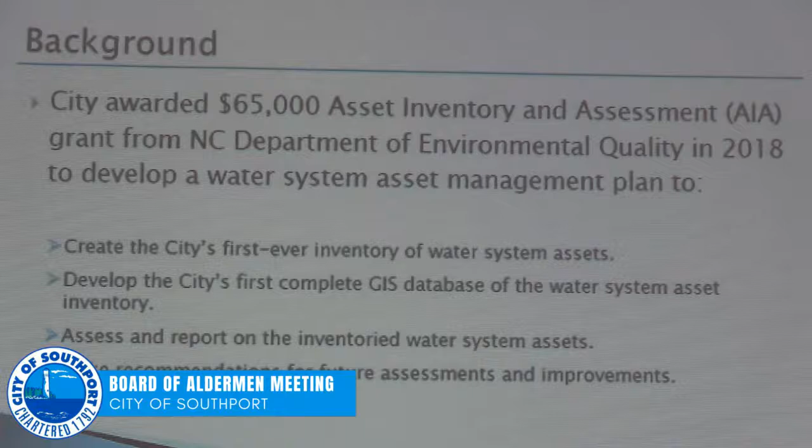The purpose of the plan is to create the city's first ever comprehensive inventory of your water system assets, to develop the first complete GIS database of those assets, to assess the condition of those assets and report on the condition of those assets, and then to make recommendations to you, the elected board, on future decisions you might need to make about maintaining and operating your system.

The consulting team is the Cape Fear Council of Governments and the Lumber River Council of Governments. The Cape Fear Council of Governments was primarily responsible for project management and taking the lead on the asset inventory and the mapping component of this project. We brought Gene in to assist with the condition assessment, the financial plan, and really crafting the bulk of the paper document, the asset management plan that I will leave with you guys today.

So what is asset management? Asset management is the practice of managing infrastructure capital assets, so we're managing our assets in order to minimize the total cost of owning and operating those assets, to prolong the useful life of those assets, so that you can deliver the desired level of service to your customers.

I think it's important to take a moment to consider this. The purpose of the asset management planning is to minimize your total cost. We're going to be getting into some recommendations later on that are going to sound a little bit like we're trying to maximize your total cost.

But in reality, the truth is that these assets have a useful life, and they're most effective during their useful life. As they exceed their useful life, they start to cost more and more to own, to operate, and to maintain.

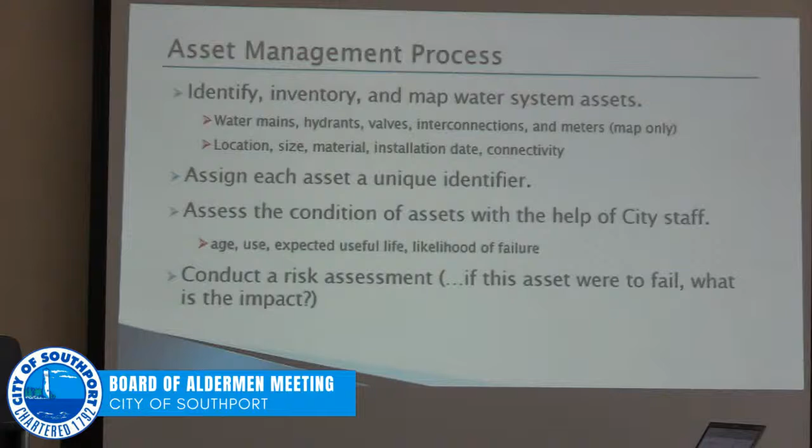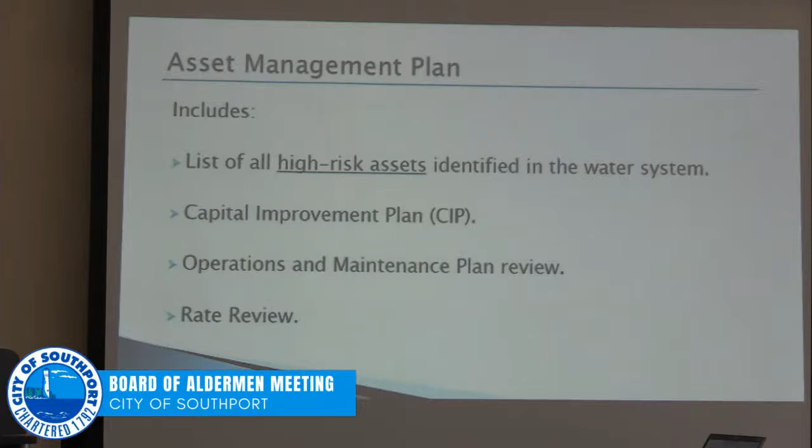And we conduct a risk assessment - the question of, if this particular asset were to fail, what is the impact to the system? So the asset management plan includes a list of all the high-risk assets identified in the water system. There's a capital improvement plan to help identify the necessary investments required to maintain operations of the system, an operation and maintenance plan review, and a rate review as well.

Something to keep in mind, an asset management plan is always a work in progress for a number of different reasons. One is that your staff is always working on the system, so this is a snapshot in time, and presumably there have been modifications and updates even since we started doing the analysis and stopped collecting locational information and inventorying the assets.

But also, the reality is that we developed this map and this list of assets from paper maps, from CAD files from developers, from old maps, and a lot of it from documenting what's in the head of your staff. Certainly there are assets that we missed, and so this is a work in progress because it's going to need to be maintained and updated. There will be changes, additions, things replaced, line breaks that will need to be improved and fixed.

So this is always going to be a work in progress, and I guess now is as good a time as any to let you know that part of this process is that we've developed an app for tablets where they can make updates and notify the Council of Governments who's maintaining this data for you that we found something new that should be located in this location, or we've replaced this asset, so now the installation date is today, and the material is no longer cast iron, it's now PVC, or something along those lines.

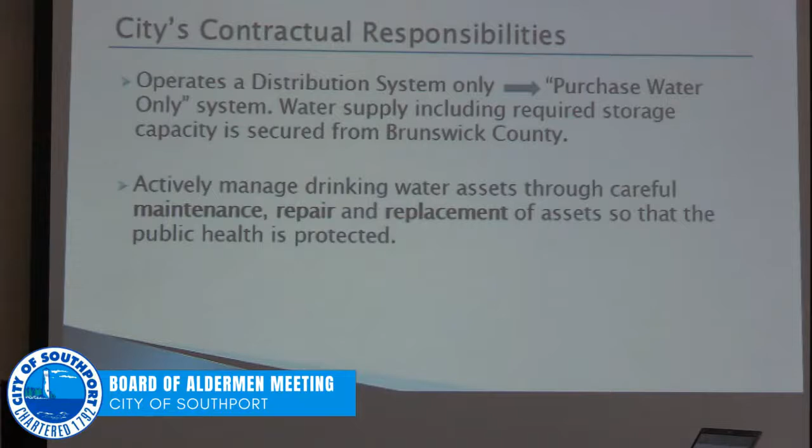So that is all your lines, the assets that Alan talked about—the water lines and valves, the hydrants and the hydrant valves. Those are your responsibilities to maintain, repair, and replace when they get to the point that they need to be replaced.

You are currently contracted, by the records I had, for 1.418 million gallons a day. That is to cover your average day use without any problem, your max day use, which typically occurs in the summer when you have more water demand because you've got more people here, and the required storage.

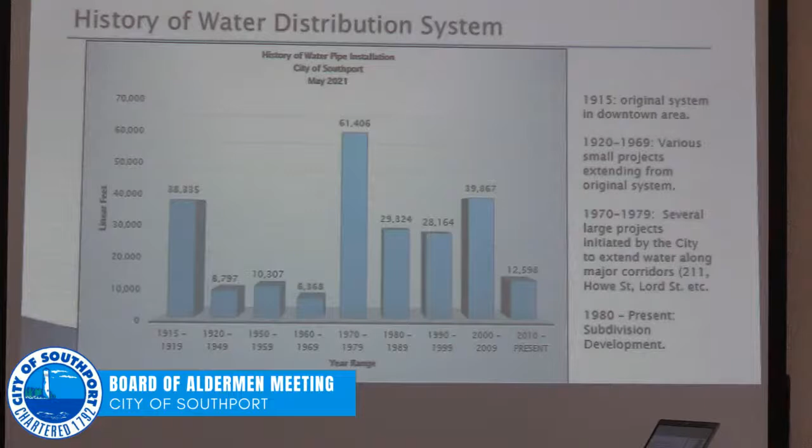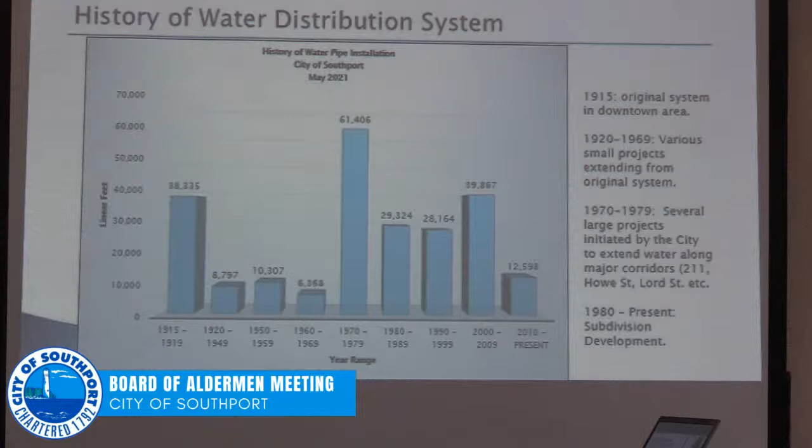Then in the years from 1980 until the present, most of the investment's been done by developers, not necessarily on the town's dollar. Those investments have all been PVC or ductile iron when they needed to have an iron component.

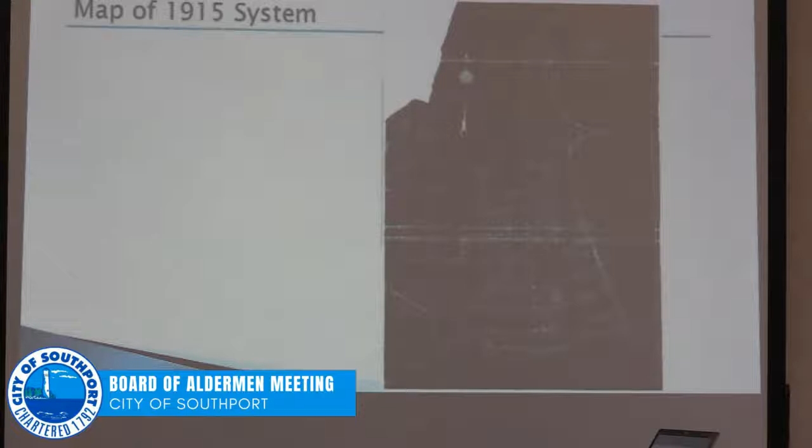So hard to see, but a really cool map—Tom has it at his office. If you ever have a chance, go by and look at it. It is the map of the original water system, and you can clearly see that original grid pattern. You have cast iron that was installed in 1915 that's still in use today in your downtown area.

So that being the case, when you look across all the water line that you have, I asked Tom this question: what's the most problematic line? What gives you the most heartache? What gives you the most maintenance calls? According to Tom—and I totally agree with this, I thought maybe he'd say some asbestos cement, but he didn't—he said small diameter cast iron line close to the surface.

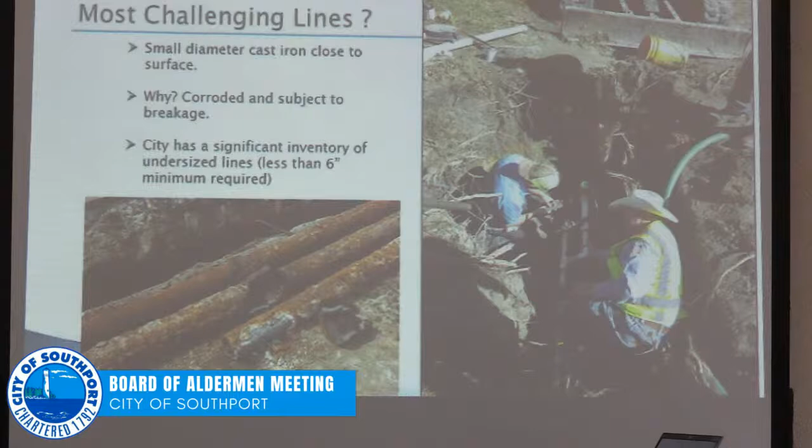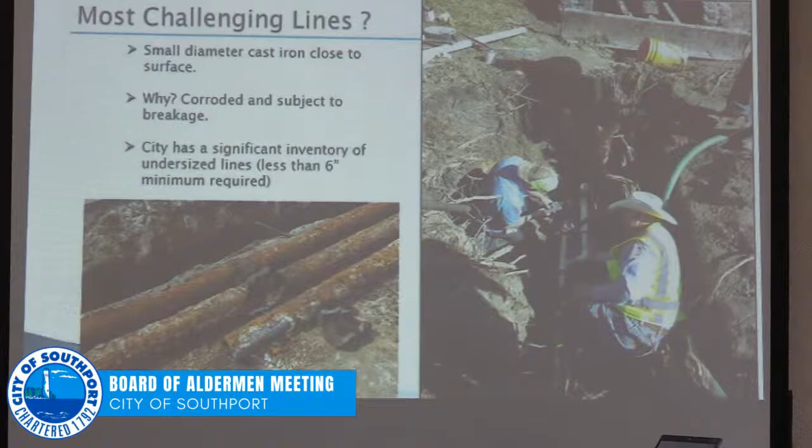You can see in this bottom left picture exactly what happens to cast iron over time. Cast iron corrodes from the inside and from the outside, and eventually it just becomes paper thin and collapses. I'd guess that most every cast iron line you have, while it was installed at a time when that was the only pipe type—that was the only thing going, the only ride to take—is thick and has done its job. It has more than done its job. It's been in the ground, and in service, much longer than its useful life period.

And so all of the water system in the downtown area, not unlike the sewer system in the downtown area that you're addressing part of now, is in need of change out.

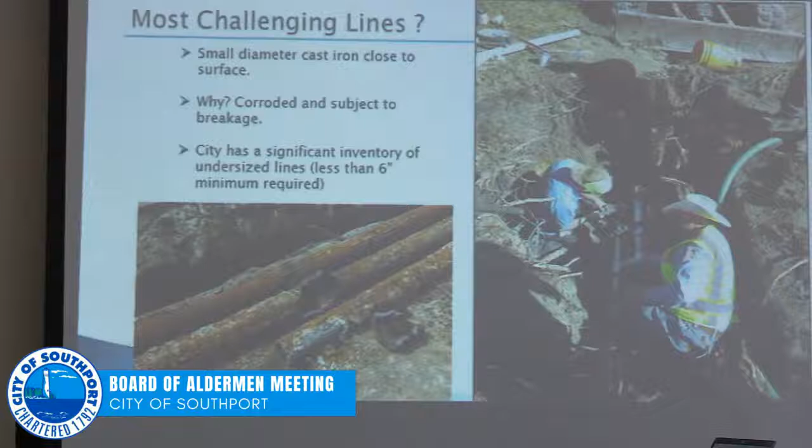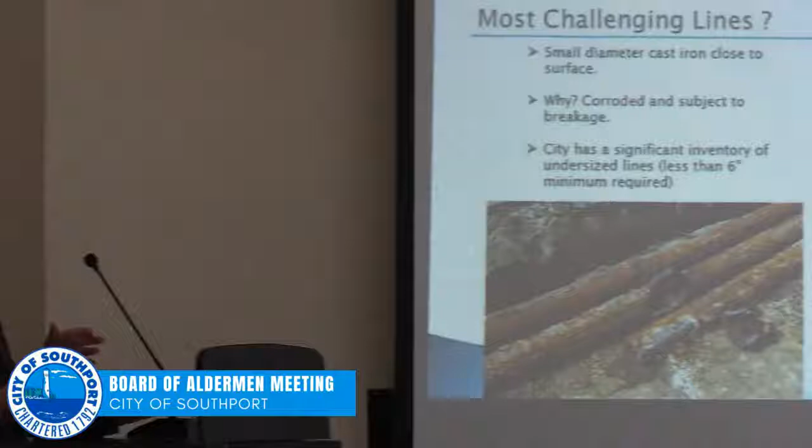The other thing I'd mention is you have a significant inventory of small diameter lines. Are you different from other systems because of that? No, every system I've worked with has 1-inch or 2-inch lines because they were easy to run and cheap. But they're undersized because the minimum permitted diameter for a water line is 6 inches. You have a sizable inventory, about 17% of your total pipe inventory is less than 6 inches.

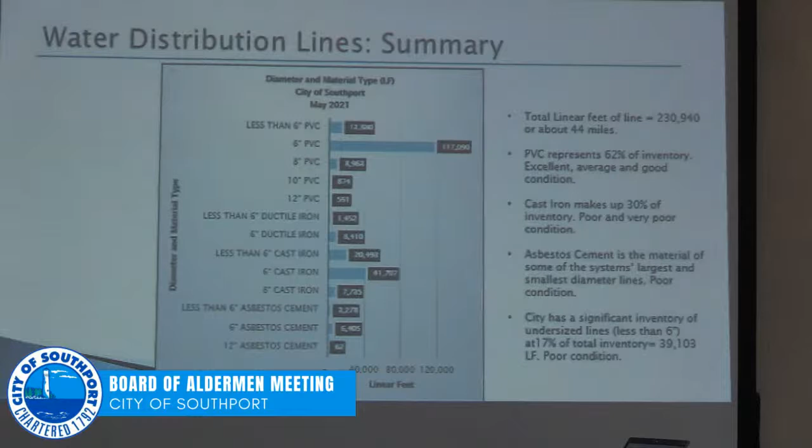You'll see us address that in the recommendations. This chart summarizes what we found in terms of the distribution lines. It's a pretty cool chart because it gives you the diameter and the material in a bar chart. The longest bar, second from the top, is 6-inch PVC, so the majority pipe type in your system is a great pipe type. All of the growth outside the downtown core is in pretty good shape because of the pipe material in the ground. It's the cast iron in the main area, and some asbestos cement water lines in various places, that are really the points of vulnerability.

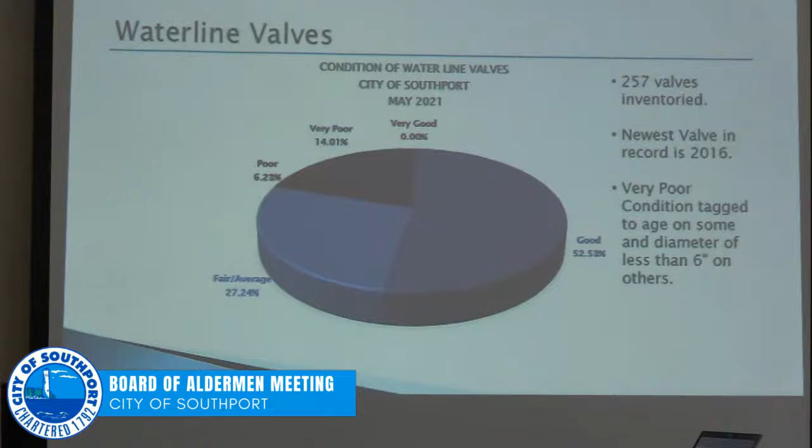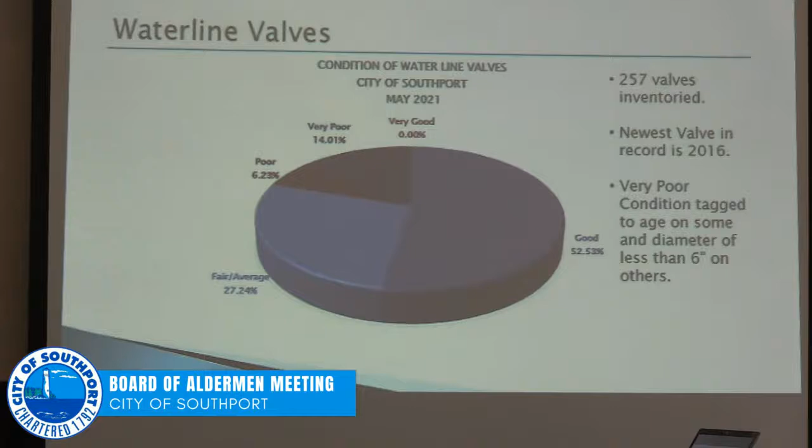Waterline valves. One of the things we said we'd do as part of this project is locate and assess valves. Alan and the young woman who worked on data gathering did a really good job working with Tom and his staff to look at where the valves are located and tag them to a line, because whatever the line install date is, more than likely the valve date will match. So there were 257 valves inventoried. The newest valve we had a record of was installed in 2016.

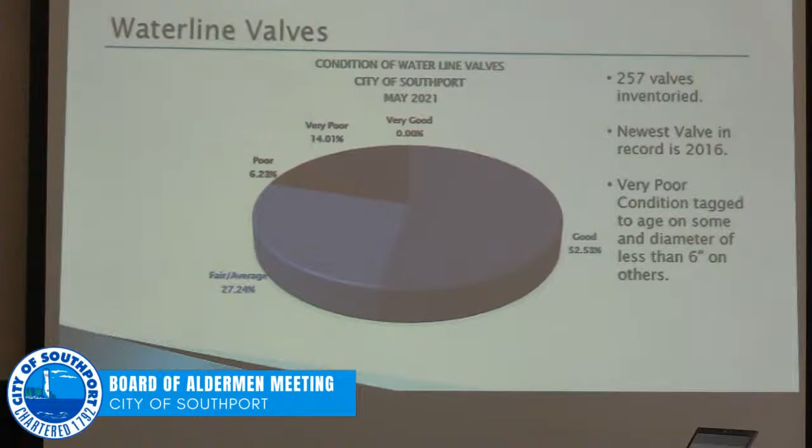The portion that is very poor is tied to age, because you've got a few valves we believe are still circa 1915, and several circa 1940. The industry standard for the useful life on a valve is 35 years, so clearly those have been exceeded.

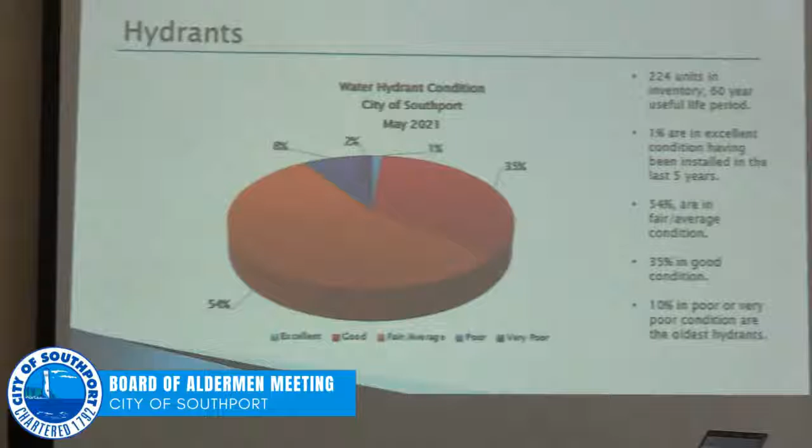Water hydrants. Through working with Tom, we were able to get data from the fire department on water hydrants. This is important from a fire protection perspective, but also critical to understanding and gauging pressure on your system at various points. In the fire, well, I call them fire hydrants and probably always will, water hydrant inventory, there were 224 inventoried. I used a useful life period of 60 years. The industry standard is 45 to 60 years, so by using 60 I was pretty generous, I might have softened the look for you all on fire hydrants by using that higher number.

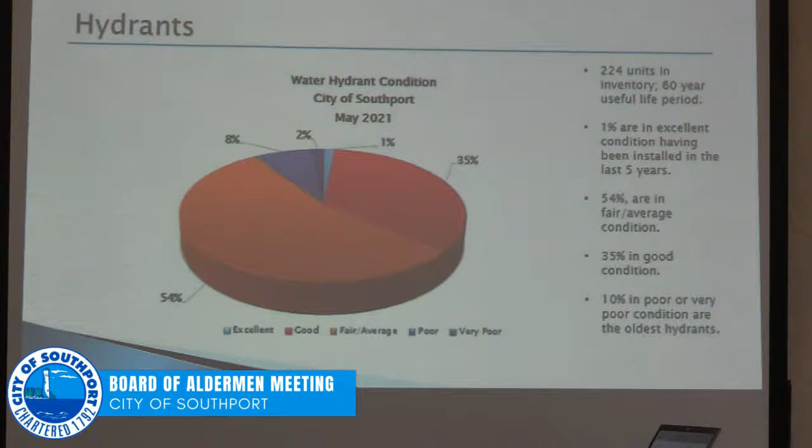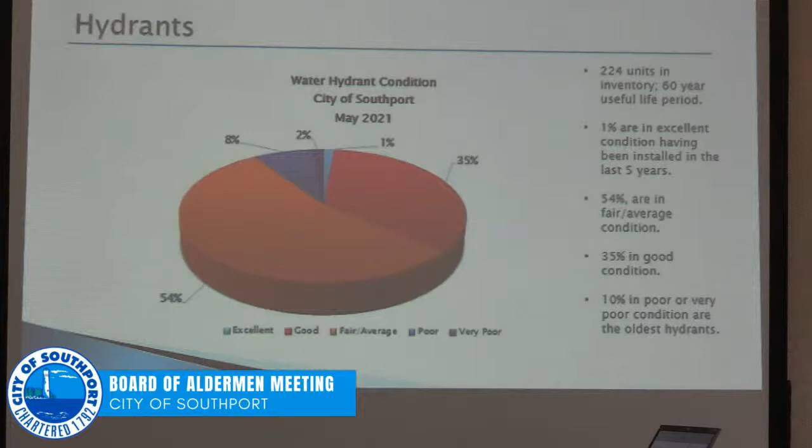There were only 1% of the inventory categorized as excellent condition, meaning installed in the last 5 years. About 54% are in fair or average condition, 35% are in good condition, and only 10% are in poor or very poor condition. Again, those are the oldest hydrants in the system.

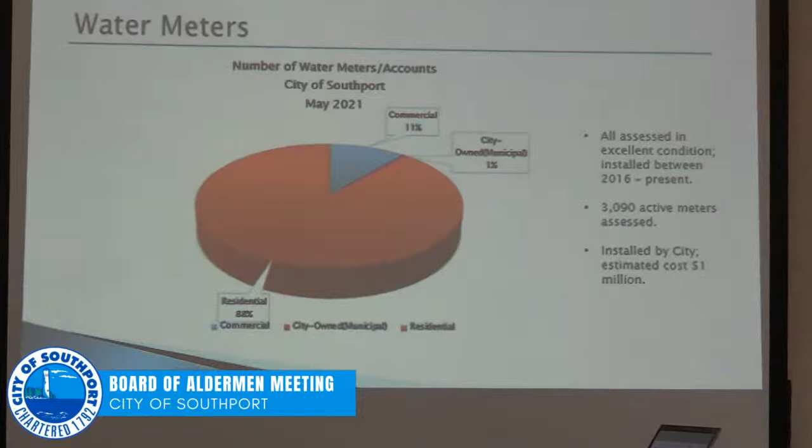Water meters, here's a success story for you. I've said in here, and in the report, you are to be commended for your investment in water meters. We collected information from the folks at City Hall and indexed those by the type of customer on the water system, and that's what this pie chart shows. Residential is clearly your majority sector, that's 88% of your water meters tied to a customer identified as residential. 11% are tied to customers identified as commercial. And here's another thing for you all to be commended for, is that you include your city-owned inventory.

Why is that important? Well, you use water every day in what you do in managing the system. Sometimes you need to blow off a hydrant, sometimes you need water for various reasons. Your city-owned facilities, the city building, this building, the fire department, are all metered. So while you don't pay yourself for the use, you are able to zero in on the amount of usage attributable to city-owned facilities. When you're looking at doing calculations on use, you can parse out city-owned easily, and that's another thing.

Thank you. That was a great idea, whoever's idea that was.

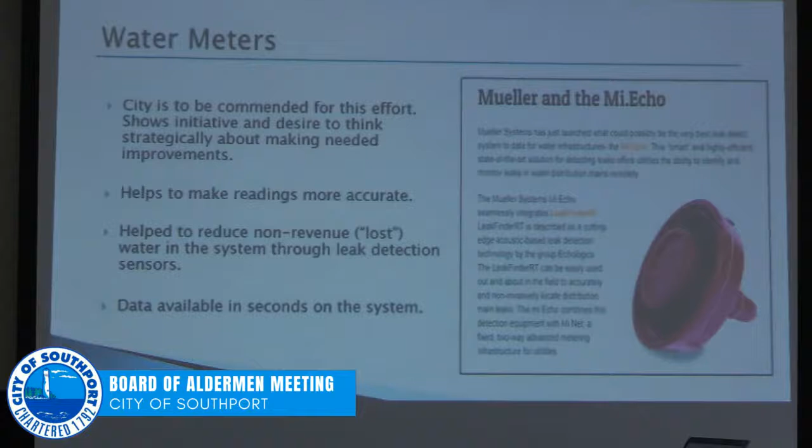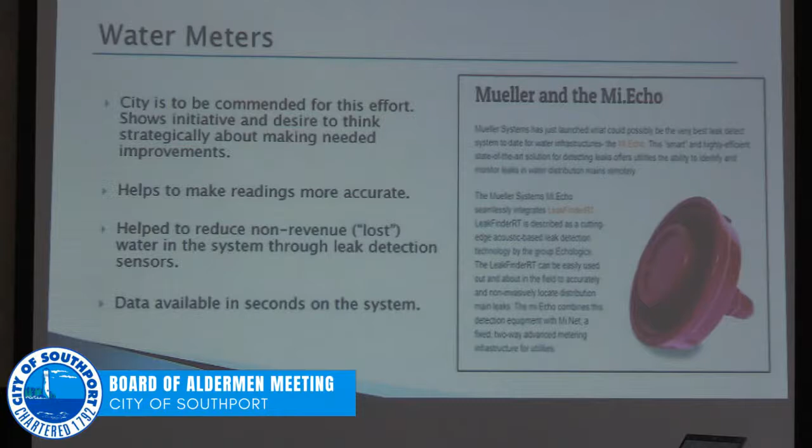Your investment in water meters and the type of meter you selected to put in the ground is pretty phenomenal by everything I've been able to find out. You have a system that is now 100% new meters, all installed, majority in 2016, but some in years since then. You have also incorporated a leak detection element, and that was a fine investment. I have yet to see that in any other system I've been working with in the counties on the coast. That's a typical investment in a Raleigh or a Cary or a Charlotte, the big urban systems. But you've done yourself a tremendous service by doing it, because now you can keep track of your usage at any point in time.

You will understand and know ahead of time that a leak might even occur, where a line is echoing or vibrating to indicate that it's coming loose at the joint or that it's fractured. Given that you have such a significant cast iron inventory in the downtown area, having this is a real bonus.

So when I analyzed all that, what did I find? Probably the most important part, other than getting the inventory done and having all the assets in one place, is to do a risk analysis. What you do is compare and assign values based on, for every asset, what is its likelihood of failure—from none, because it's brand new, to extremely likely, because it's very old, past its useful life. You index the likelihood with the consequence. So what's the consequence of failure? Is it mild? Is it moderate? Is it catastrophic?

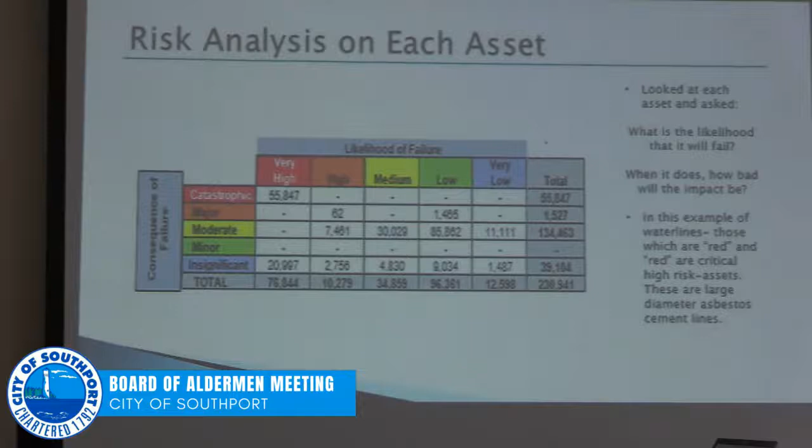So this helps you narrow down on where strategically you need to make investments. Yes, you have a lot of undersized lines, and that's painful, but we can address those over time as we do other projects. But if you've got a large diameter line that's vulnerable, and the consequence of failure is catastrophic, that's where you need to zero in attention. This is done on each one of the asset groups.

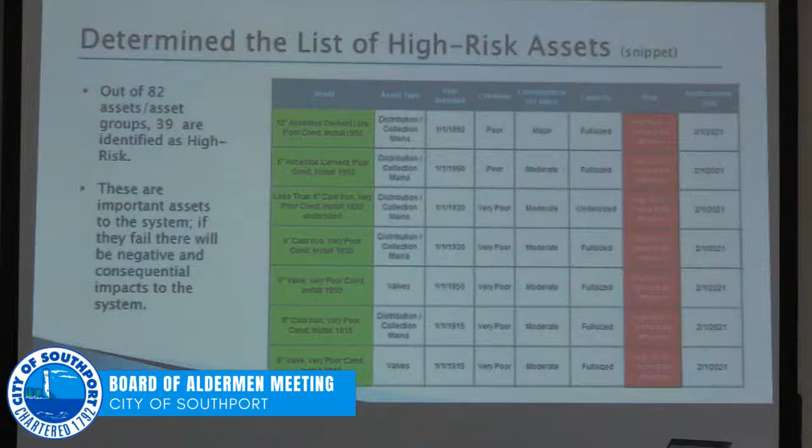That's all combined and put into a list of high-risk assets. We inventoried 82 assets or asset groups, and 39 of 82 have been identified as high risk. The reason for that—roughly half—is because of the age of the lines in the system, which pull very quickly into the high-risk category. So in the report, and in the digital copy you'll have access to, this high-risk asset list is one you should refer to as you begin to think about what kind of improvements you are able to take or need to take on the water system.

The other piece in here that's very important is a pullout. You now have a capital improvement plan for your drinking water system, which parallels the one you have on your wastewater system. The CIP, as everybody calls it—the acronym—is a plan for scheduling the investments, financing the investments, and then implementing those projects.

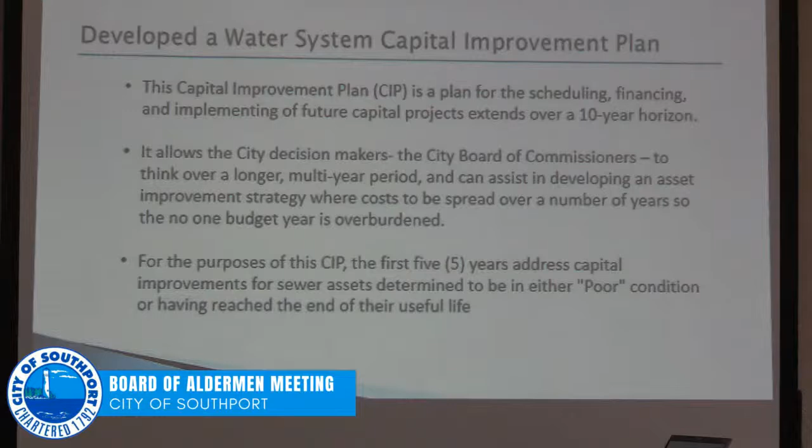And it's set up on a 10-year horizon. So we look really closely at the first 5 years, and then we group years 6 through 10. We look closely at years 1 through 5 because that's where you've either got backlog needs that you need to deal with, or needs coming up in the near future that need to be assessed and dealt with. What the capital improvement plan allows you to do as decision makers, because you are the point of decision making on investment for Southport, is decide when and where and how to address the CIP projects.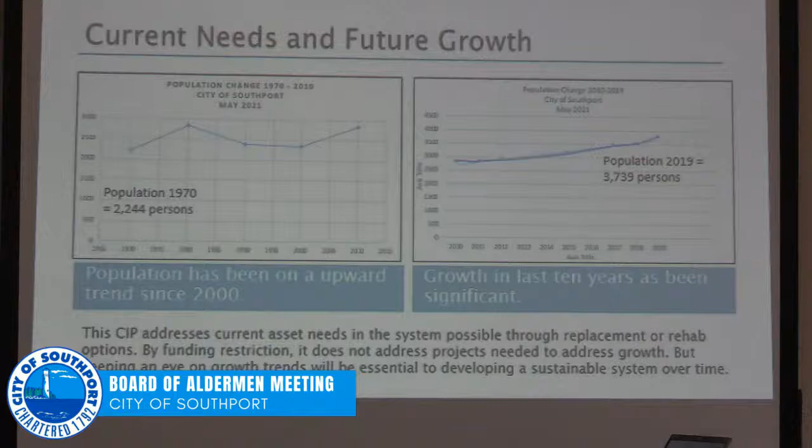One of the things about this CIP that I need to mention is this: when you secure funding from DEQ, the Department of Environmental Quality, for these asset inventory projects, one thing they will not allow you to consider in the CIP is future growth needs, because their lens is on what's in the ground now, what the vulnerability is now, and fixing that. So this CIP addresses all of that very clearly.

But I'm putting this in here because the other part of the picture for you all is that you are in a physical location where you have an economic driver out that window that will always put you in a position of being able to foster growth. And the question is how you do that in your infrastructure system.

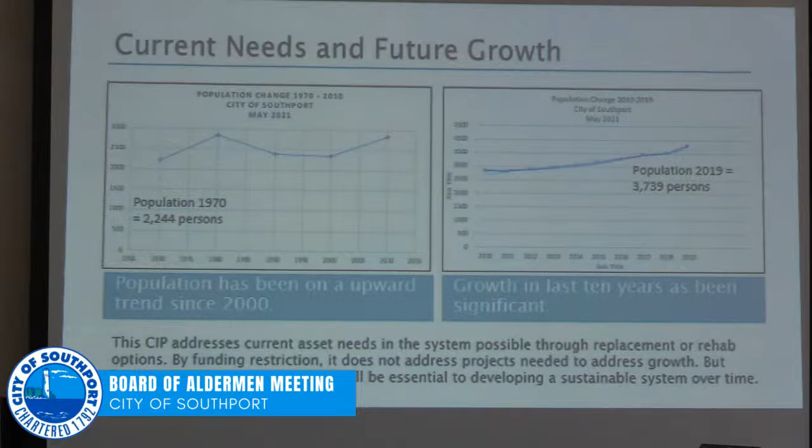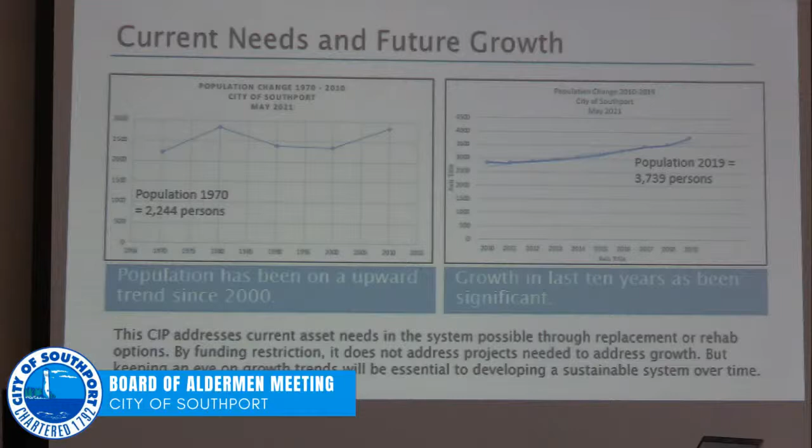So these are population graphs. The one on the left is 1970 to 2010, and you can see it tipped up in 1980, then dropped back down, and now in 2010 was headed decidedly up. The second is the last 10 years, 2010 to 2019. 2019 population figures are the last available good population numbers. You'll hear the 2020 population is blah, blah, blah, but if you really want to zero in, you need to go to the 2019 figures because they're certified. So your population is definitely on a trajectory up.

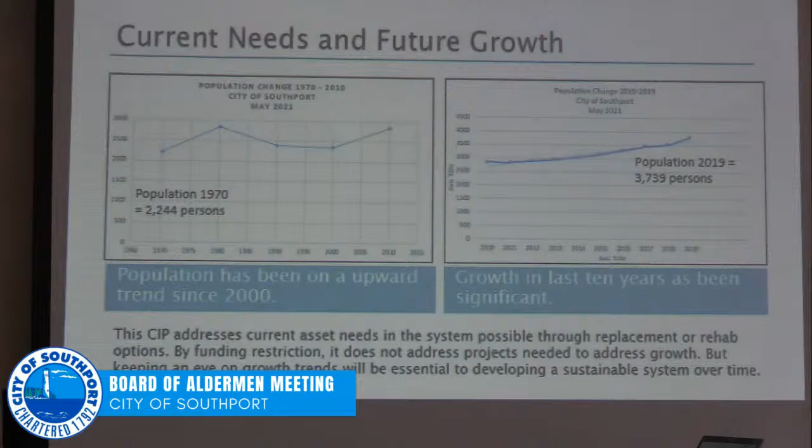So why is that important? Well, you're going to have extension requests, expansion needs that will have to be addressed. You're going to have to add additional storage capacity. I think you're grappling with that right now, because you have to have a certain amount of storage capacity based on your average daily use and your max day. So just a mention of that, so you understand what you've got in this CIP is what's in the ground now and needs to be fixed based on the current inventory.

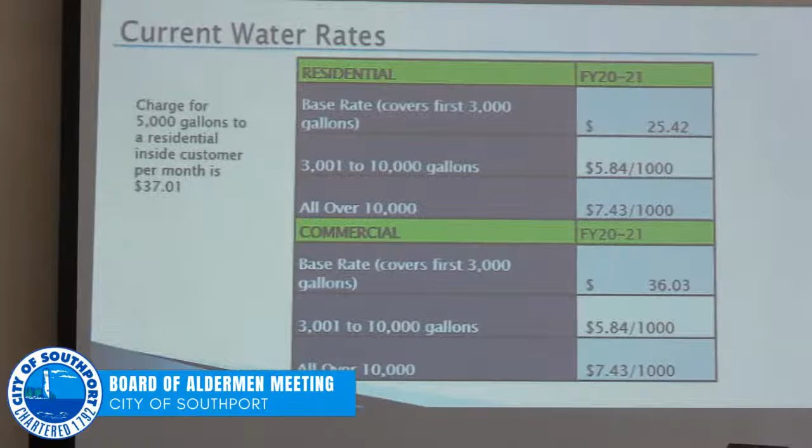Understanding rates and being sure that you're looking at the right revenue figure and the right expenditure figures is really important. So first out of the chute, what's your rate now on the water side?

So your water rate, you have a residential formula and then you have a commercial formula. I'm going to concentrate on residential because that's the majority of your customers. Your base rate covers the first 3,000 gallons, right? And that charge is $25.42.

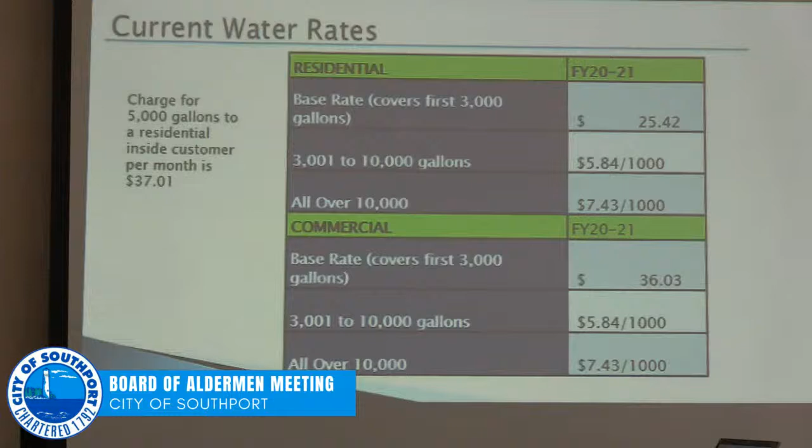And then you have two steps in what's called a stepped system, or an increasing block rate structure. Your first step is 3,001 gallons to 10,000 — that's a pretty hefty step — and any consumption in that range is $5.84 per 1,000 gallons. Then there's the step of everything else, everything above 10,000, and that is $7.43 per 1,000 gallons.

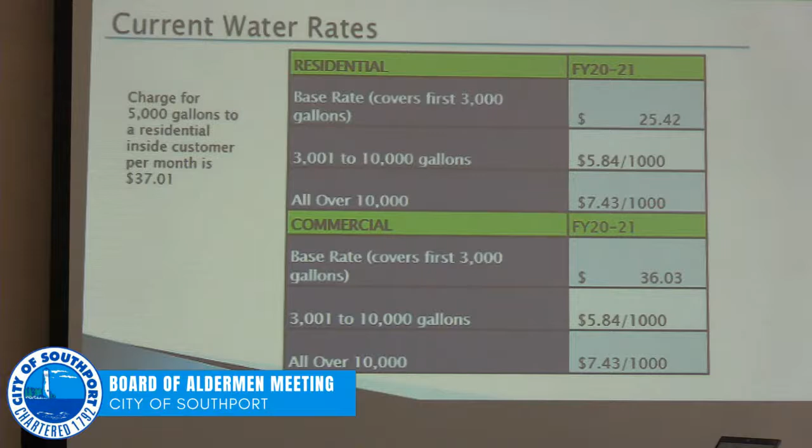So when you're doing comparisons on rates, the industry standard is to look at 5,000 gallons of consumption per month, because on average a residential customer consumes 5,000 gallons at least per month. Now, you will have customers in your system that will never hit that because they're single person households, for instance. But on average, yours is driven by a lot of people coming in and demanding water and then leaving, right? Your charge for 5,000 gallons to a residential customer inside the city limits is $37.01 per month.

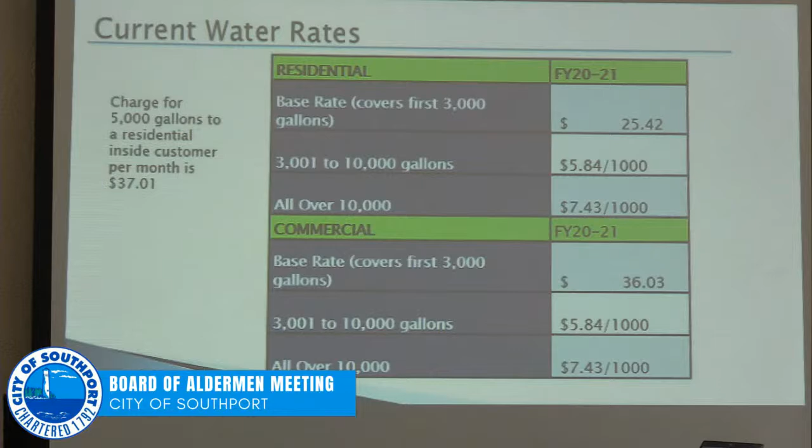The School of Government, the Environmental Finance Center, started this project years ago, and they have water rates that have been submitted by communities like yours, and you have been religious in responding to this. So I was able to pull your charge at 5,000 gallons a month from fiscal year 06-07 all the way to 2021. That's a 15-year history, all right?

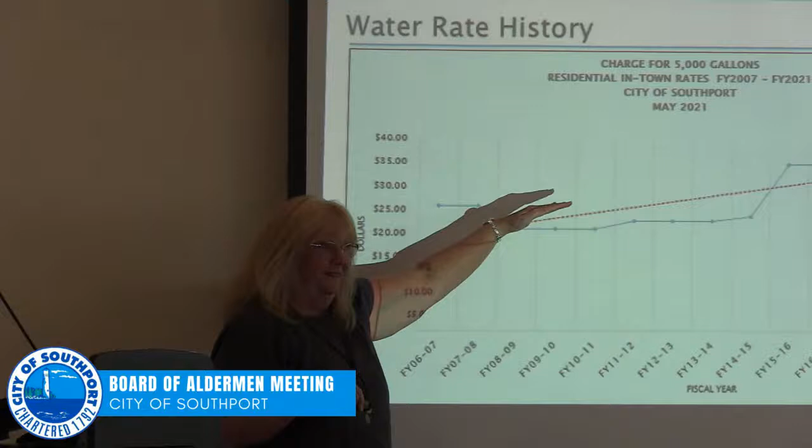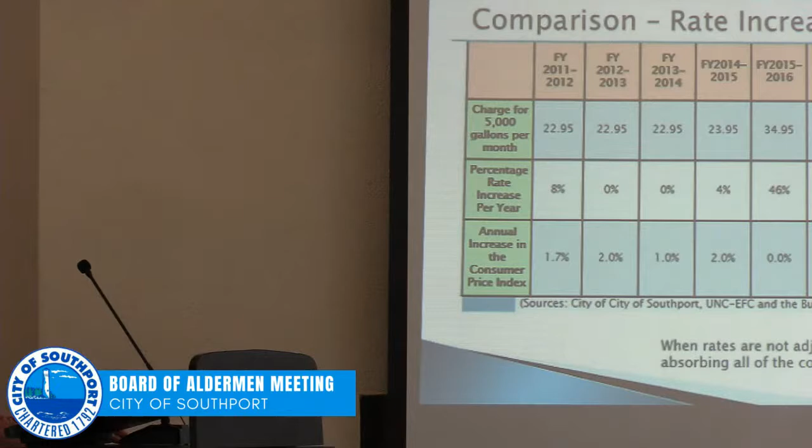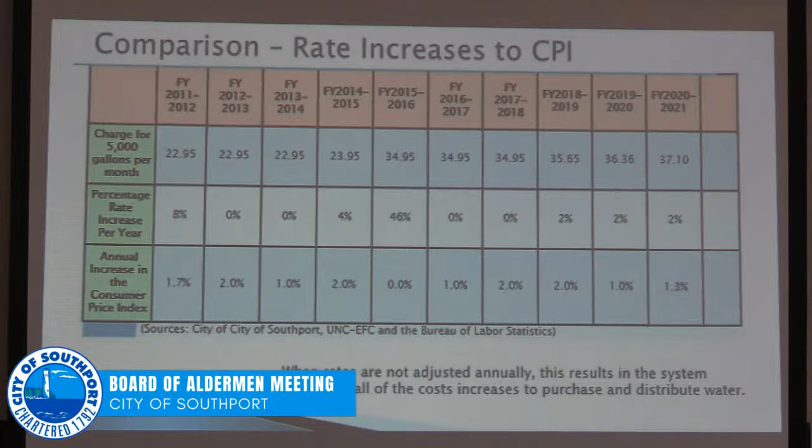Why is that not a good idea? There are many reasons that's not a good idea, but here's the one that I think is the most relevant. Every year, the input prices for everything we do as a municipal organization goes up. Your labor costs go up because your health insurance goes up, and because you want to pay folks a little more each year to encourage them to stay with you over time. All of the inputs for pipe, for all of the maintenance work that has to be done, all of that goes up. Electricity goes up.

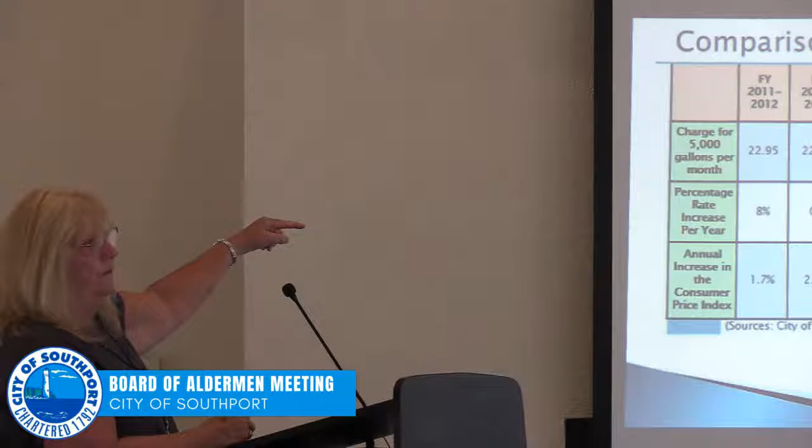Have you ever heard of rates dropping? I don't think so. So I index the percentage of rate increase per year to the CPI for that year. Just to make this point, in the years where you choose not to gently raise your rates, you are eating all of that additional cost. And there is only a certain tolerance that a system has for how much of that it can absorb before the well runs dry, so to speak.

So what is the best kind of rate increase to make? A gentle one — at least a 2% or 3% increase a year — because the majority of your customers will hardly notice that. But it gives you that cushion of having protected yourself from the increases in all of your input costs, rather than waiting and not doing a rate increase, and then all of a sudden you have an emergency project you need to take care of, and you've got a whole system of ticking time bomb type lines that are going to have to be addressed at some point soon. You don't want to fall behind, not now.

So again, is raising rates fun? No, it's not. Is it the responsible thing to do? Absolutely. What is your job? To manage the town responsibly and to prepare for the future. And you are lucky, so lucky, compared to most of the systems I work with that are inland, small, poor, and have nothing but their backs up against the wall. You have an economic driver right there. You have the history of this town that you need to build on and support, and that will always make you different from those small rural communities I'm typically dealing with.

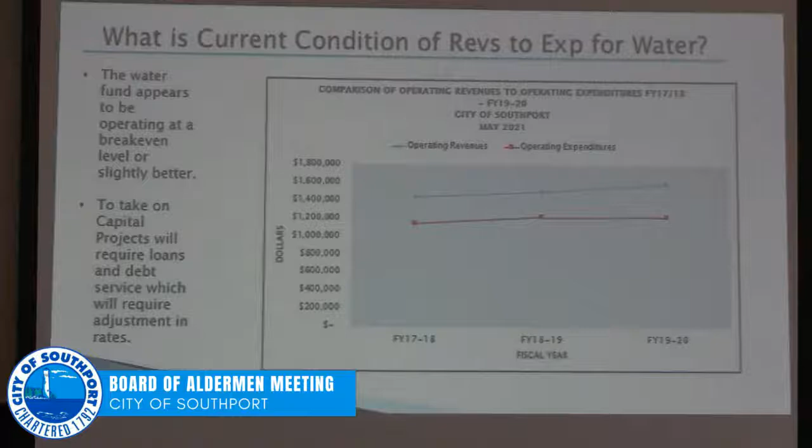Your revenues are broken out. On the revenue side, you have a sewer set of revenues, and then you have a set of water revenues, so you get a real clear picture there. But your expenditures are combined, so somebody's got to sit and parse through those and pull them out. That's what I did, to the greatest extent possible, so that we could get a picture for today of what it would be if your water system was forced to stand on its own.

And your water system could stand, and does stand. That blue line at the top is your operating revenues. The red line is your operating expenditures. So you've got a nice cushion between those two.

Is the cushion enough to take on debt service for a loan of the magnitude that you will need? No, it's not. So don't look at that and say, oh, we don't have to raise our rates, because you are seriously going to have to think about adjusting your rates. But it is a good thing, because it shows that you've got some tolerance there between the two.

But when you group sewer in with water, and you combine the revenues for water and sewer, you are operating dangerously close to a break even or below, and you can't be there. So what's effectively happening is that any buffer on the water side is being absorbed on the sewer side.

So here are our recommendations. And as this says, these are recommendations, but you all have to decide: are you going this way, are you going this way, or are you going another way?

Recommendation number 1: due to the age, condition, and strategic value, the city should plan for replacement of the cast iron lines in the system. This would include valve change-outs and any other additions that might be needed. The inventory of cast iron lines and valves has served well beyond its useful life period. And every day that you're operating with those on the ground is a blessing. But that day is going to end. And if it ends tragically, that will be awful.

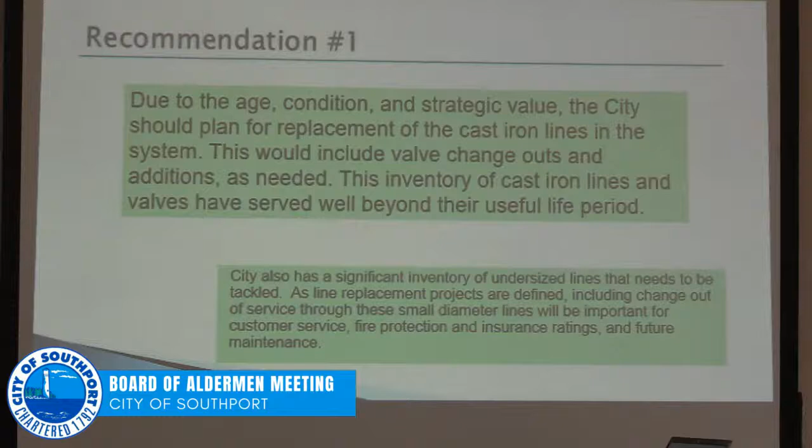Recommendation 2: while water loss is not a current significant problem, and I'll give a shout out to the meter selection that you made on that one, the city has numerous aged and failed or failing lines that could cause water loss problems at any point. You need to continue to monitor those through your new metering system and take actions as you need to reduce those losses when they occur.

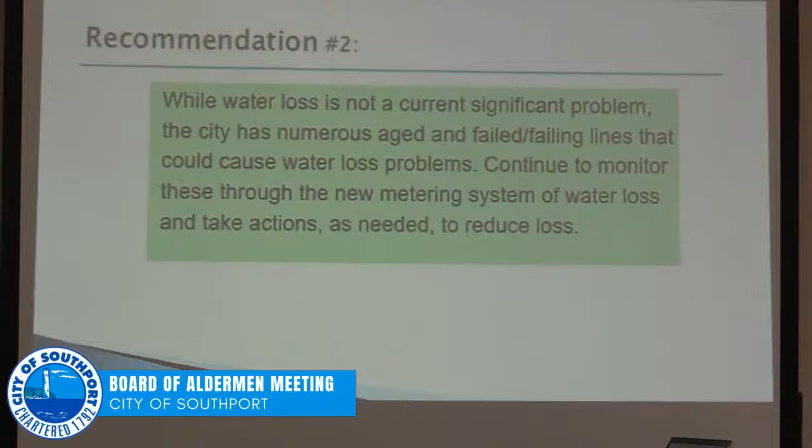Recommendation 3: your valves have been located and mapped, and that is a wonderful thing.

However, we suspect, as does Tom and his staff, that there are other valves in the system that have not yet been discovered because they weren't mapped on an old map, and we don't know that they're there yet. So as those are discovered, they need to be entered into the map system to show where it is, what the diameter is, and we need to add this to the inventory. Also, you need to continue and really beef up your valve exercise program. That's something DEQ is going to be looking more closely at on water systems, from what I understand.

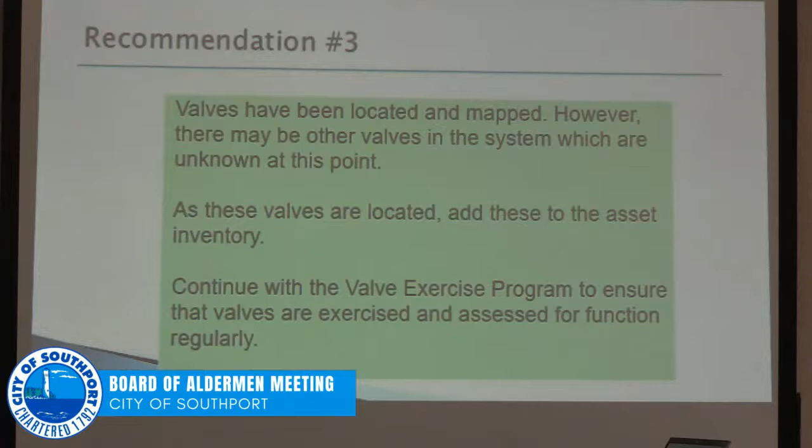Recommendation 4: continued attention should be paid to water use. Since the city is a purchase water customer of Brunswick County, water use is very important to track to make sure you've got sufficient capacity, but also to guard against water loss. Because any amount of water you lose, Brunswick County doesn't care—it went through the meter and you're going to pay full price for it. So it's really important to keep track of water loss. And I think that's why the cast iron is worrisome to me, because it's kind of a ticking time bomb.

Recommendation 5: an annual assessment of water rates and the sufficiency of revenues to cover your operating expenses, your operation and maintenance, and your existing and future debt service should become a regular practice. I'll give a shout out to the city as well—I was talking with Ms. Lara before the meeting, and she indicates you have a rate committee and are actively looking at these types of questions. I definitely want to commend you for that, because you need to. It's good because you stay ahead. It's always better to get ahead of a problem.

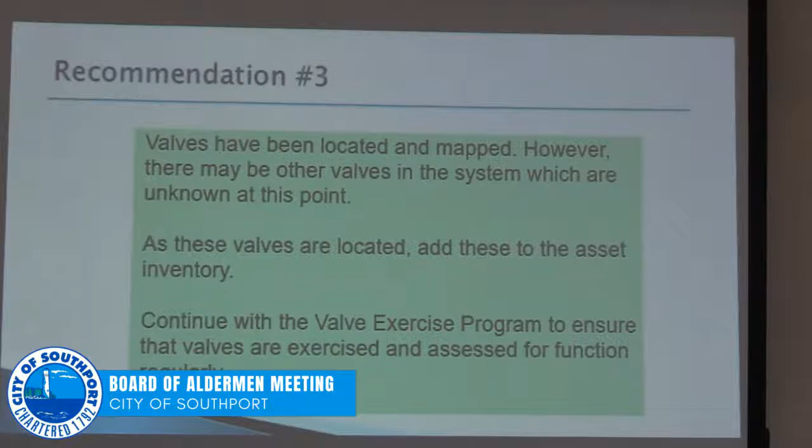There is one thing not in the presentation I did want to mention. Back on this slide, when Gene was talking about adding the valves to the asset inventory, I mentioned that we have an app where your staff can add that stuff. I also wanted to add that one of the conditions of receiving an asset management plan grant is that you're expected to maintain this inventory of assets, which was really a Herculean effort on the part of staff. But in order for it to have lasting value, the funding agency expects you to continue to use it.

So honestly, I forgot to look before I came. I know when we finished the sewer asset management plan, you guys had a contract with the Council of Governments to continue maintaining that database. I don't remember if we wrote it broadly enough to include water and sewer. I feel like we did, because you already had the water grant when we did that contract. But I'm going to need to look back at that contract—we may need to review it. I don't remember what the contract term was or anything like that.

Obviously there's a sewer project happening right now in town. There are always going to be little water and sewer projects where things are going to get upgraded, and obviously it's important to stay on top of that, and that will serve you very well in the future. So with that, we'll open it up to any questions you guys might have.